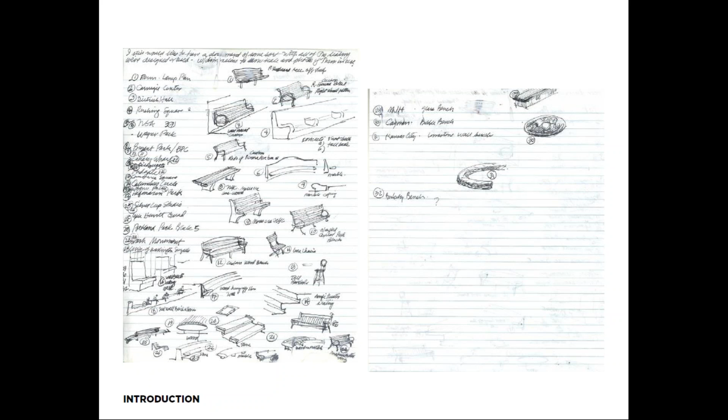Well, I know you worked on Apple in the beginning, some of the earlier mock-ups. Yeah, a lot of those. Still changing. So custom benches and furnishings is something that Olin has always been involved with in the last 30, 40 years. And a few years ago, Laurie sat down and just started listing how many benches have we done. And he started writing out the project, doodling every profile, and hit 32 and realized that we needed to actually start recording this information.

And so, was this you, Will, that you helped put this together with Bonnie? Katie and a lot of other people. Yeah. So this is on the knowledge base. We've pulled all the details and profiles of a number of benches. I think this is somewhere in the 30s, but all shapes and sizes, freestanding, backs, without backs, double wide, attached to walls, all sorts of varieties that I'll kind of explain, a little bit of history, pick a few benches. Not all of them are going to get their photo in this, it's just too many.

But I'm going to explain kind of the process that's involved for custom furnishings, who to coordinate with, when to do mock-ups within each phase, and then some lessons learned that I've learned and others in the office have learned through some of our installations. So why do we do custom furnishings? And why not just pull up this lovely catalog I saw up front yesterday, Street Life, to Miss Laurie Olin, where it seems like there's every type of bench you could get. It's all off the shelf, but it seems a little fake, because everything's photoshopped into some other landscape. But we do go off the shelf quite a bit for a lot of our furnishings.

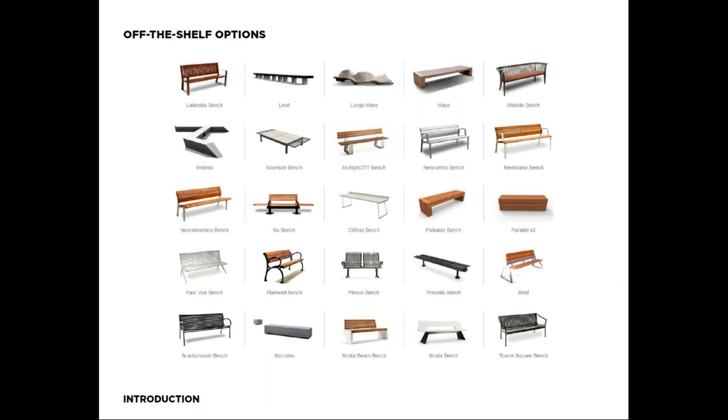It's easy to go to Landscape Forms, select a bench, and they have all sorts of varieties and styles, and a lot of times this is good. This is what they do. They deal with this every day. They know how to work with all these materials, and they're continuing to update it. And they all have their place. So this is at Comcast. They have their place in the landscape. It's an off-the-shelf item, and a lot of times it depends on the client and the project. When you need to do a lot of benches, you can't do them all custom. The cost is too prohibitive. And a lot of times if you work with universities, they're going to have their standards ahead of time, or you help develop that standard with them through a master plan and guidelines.

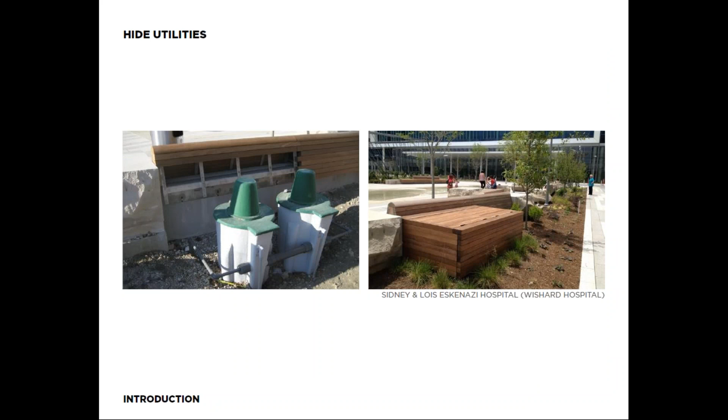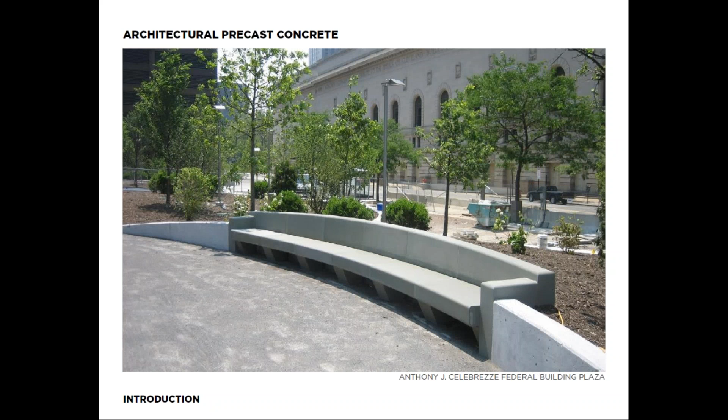But sometimes you need your furnishings to form space, like a park, or it's more central to the space, like at PAFA. They can be security elements. Sometimes we need them to hide big, ugly utilities. They're accent lighting in our landscape. And there's a lot of different materials that we've used over the years. There's stone. We've used architectural precast concrete at Celebrezze. It's all prefab in the shop and brought out. Wood, steel, glass, and acrylics as well, the bubble bench at Camana Bay. And we've even done recycled materials for Growing Minds out of pallets that we put together in the basement here at the Public Ledger Building.

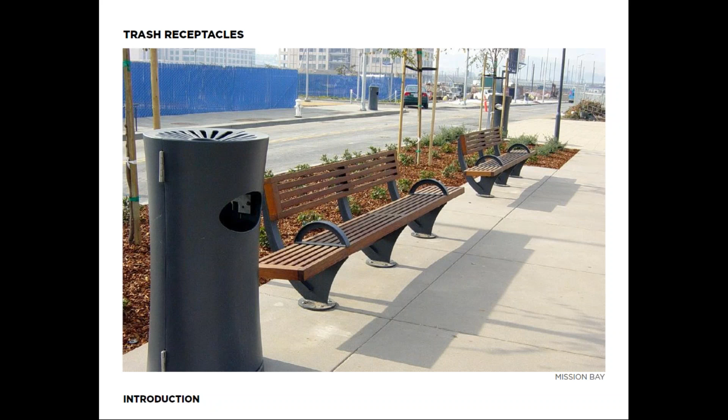We've also designed trash receptacles. I don't know if this one is still around. It used to live right outside this door, and it was a big sign not to put trash in it. That was their zombie thing. Yeah. That was at Mission Bay. We're working with Landscape Forms right now at Apple to develop a trash receptacle that's going to be used on the campus. So we're still playing around with trash cans that are custom.

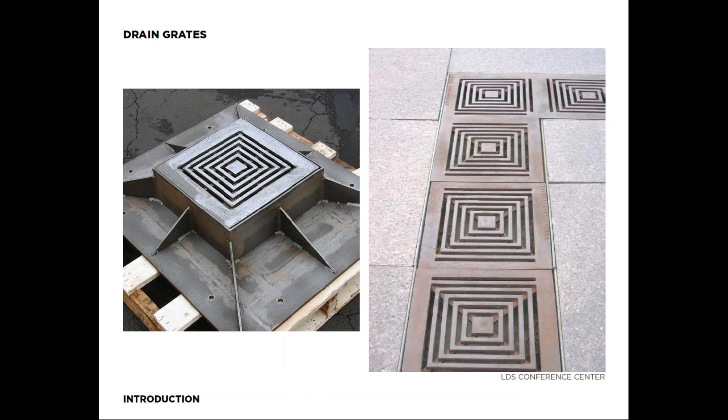And tables, like the grande cheese, that Sue's working on now with Michael to develop this tabletop that's also a fountain, and it drops off into a basin. And then there are all these little tables that connect to it at the end that can then be spread out across the courtyard and used on a daily basis from the 2 to 4 person tables, but then it can be all ganged together on this fountain table to get the whole company together to have a big event.

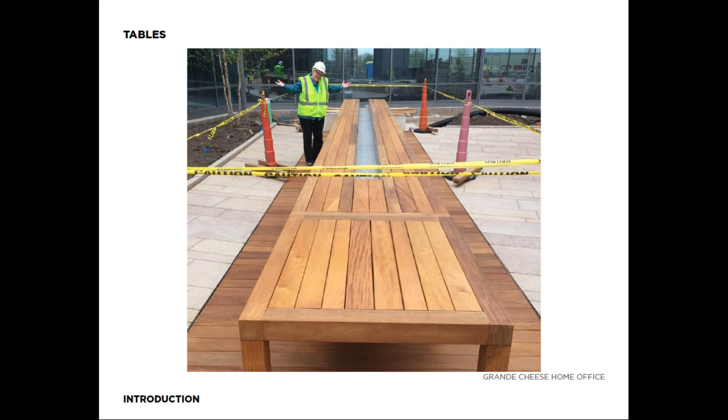So not every project can do this, and for a number of reasons. The client sometimes doesn't want to deal with it. It's a lot of headaches. They're customized. Some of them have strict maintenance requirements that are needed. Budget, both for the construction budget, they can be very expensive. I think the one at Museum of Jewish Heritage was $1,000 for every foot in length, which was kind of how it averaged out. So sometimes it just doesn't make sense from that standpoint,

and also costs us a lot of money. It takes a lot of work to do these custom benches and to design them structurally and fabricate them and to go through all these various mock-ups. And then schedule. So a lot of times there are lead times to procure the materials, especially some of the woods, FSC certified products. And construction, they are very tedious and require some specialties.

So the process, try to break it out for each kind of phase of work. So in concept, you're coming up with the flashy graphics, you've got the idea, you're making the client love it because they're the ones that need to say that they're going to pay for this throughout the project. So get their buy-in early, get them excited. Schematic drawings, you kind of start to get into a little bit of the nuts and bolts because you need to provide a drawing for pricing. So you need to get a rough cost established early on.

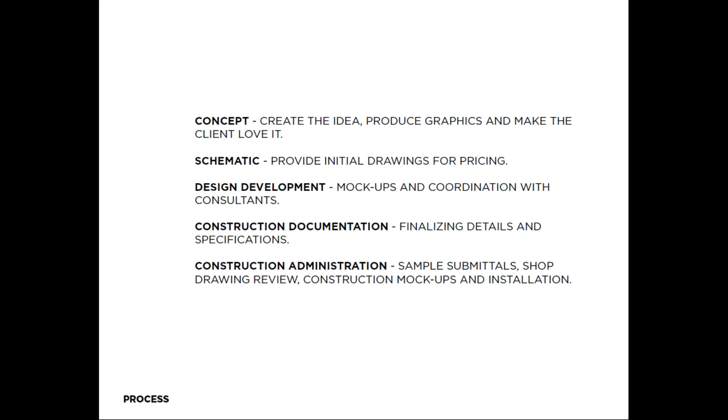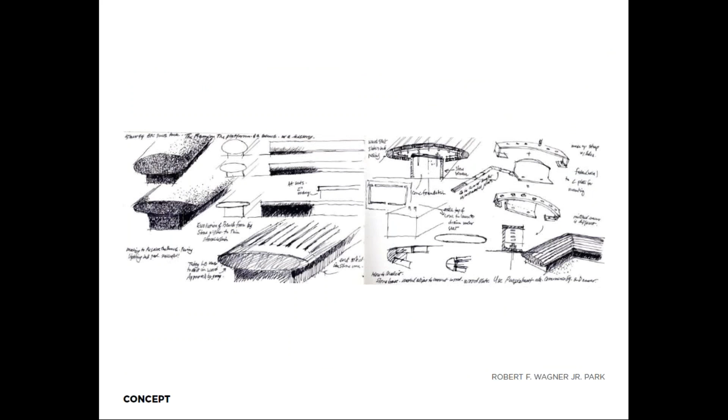So concept phase. These are some early sketches pulled from Laurie. This is Washington Monument Bench, Wagner Park. Kind of worked out a lot of the details with some of these drawings for the straps and kind of developed the overall profile and then worked out some of the nuts and bolts. And then this is Yale Hewitt Quad, which is a stone bench that had a lot of curves and twists, and there's a big sculpture.

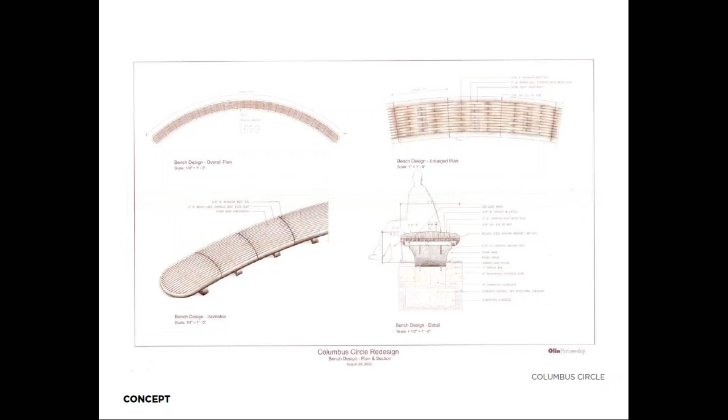Camana Bay, so this is the bubble bench, one of the earlier renderings. You guys are going to see some nice stylish graphics here, some of these early days. Columbus Circle, some of the original sketches there. The nosing was quite different in that section. For Museum of Jewish Heritage, I'm not sure who did these, if this was Howard that did these sketches. But this was him kind of storyboarding the front entrance and how to deal with security to make it look like it wasn't security. Instead of putting a string of bollards, we wanted to create furnishings that would allow for that barrier to occur.

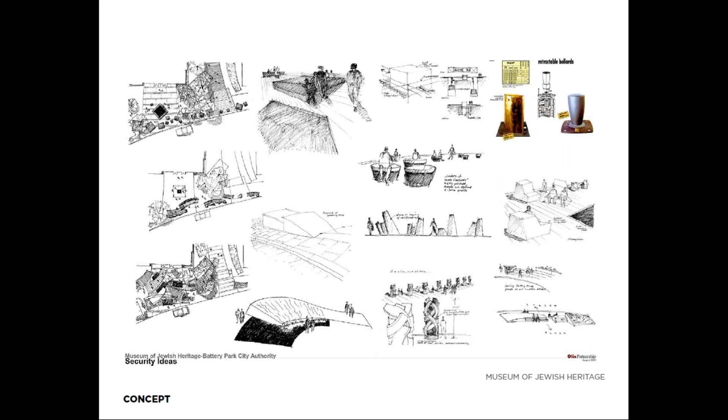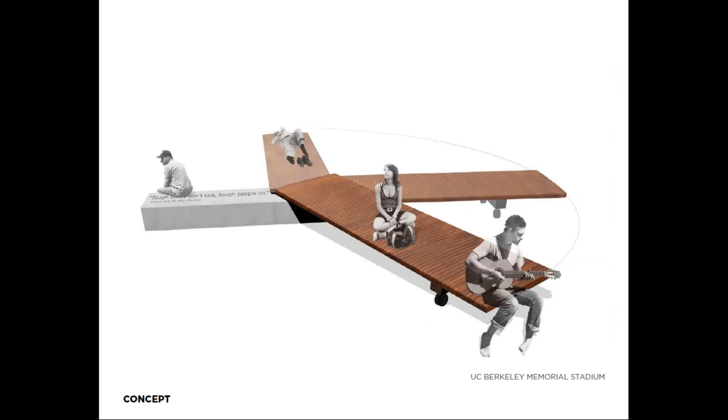And this is an early rendering of MJH on the back side, the water side of the museum, of the central sphere. And sometimes we design benches that never get built. So this is a concept at Berkeley that went through a number of iterations. Jesse Forrester was working on this and was really trying to work out the gears assembly to make this move and be flexible and not kill somebody and pinch them in the swing, and working out the wheels. And this one, for cost reasons, just didn't make the cut. The ribbon bench at Canal Park, the early sketches. I think Katie Martin was doing these.

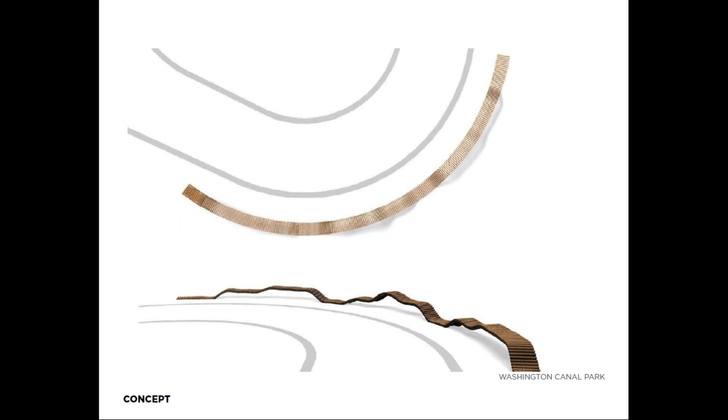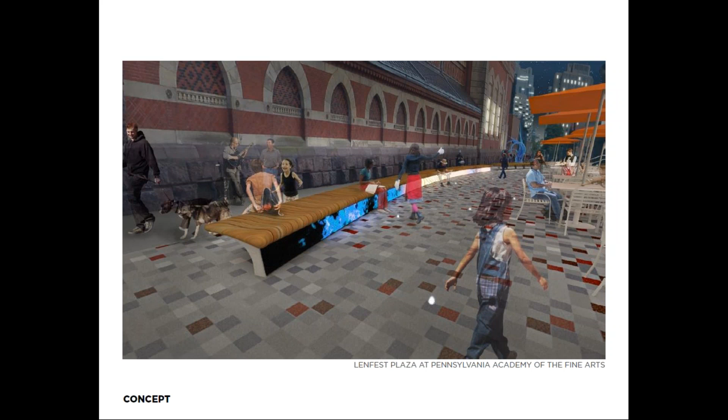And at Lenfest Plaza, PAFA, there was an idea to have this billboard, this kind of LED display that didn't make the cut, but the overall bench did. And this is an example of a schematic design drawing that Bob Bedell, God bless him, sat down one day and drew this, half scale, took that earlier rendering of what the bench was, and we had other sketches and renderings, and he figured out every angle and worked out how to put this thing together. And it pretty much resembled that toward the end.

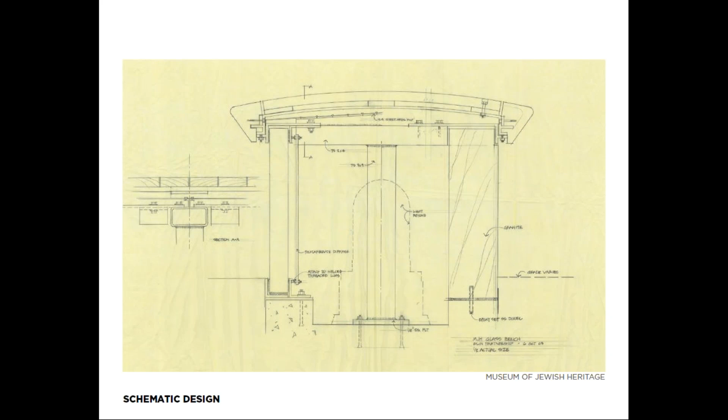This one was a T-post with a leveling bed, so that was your structure that then you ran all the angles off of, and they were regularly spaced because they were a security element in the plaza, and you could tie in your glass on either side or the stone on the back side. And it also needed to be accessible because at this time they had light fixtures at the base, and eventually it moved up to the top underneath the bench coping, so you didn't see the source.

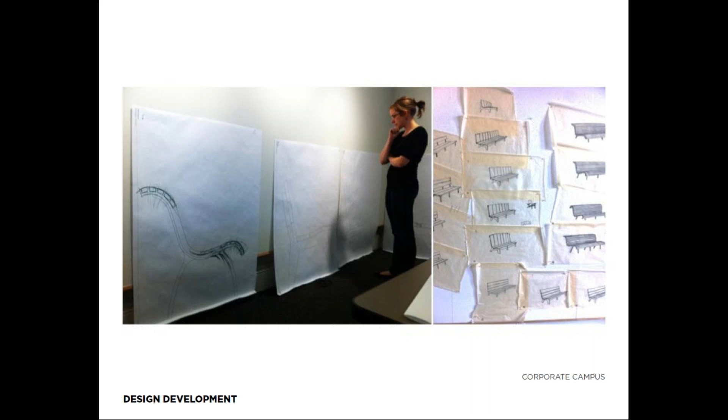In design development, we're constantly refining and tweaking. This is for Apple. Laurie was drawing over a full-size printout and working out all the curves and getting the slats right and the angles right, and then drawing multiple versions of a freestanding bench just to get the legs right. He was fiddling around with what the legs should look like and how they should be supported.

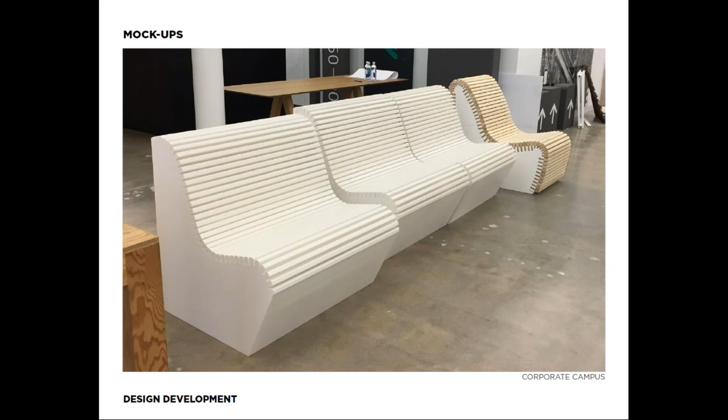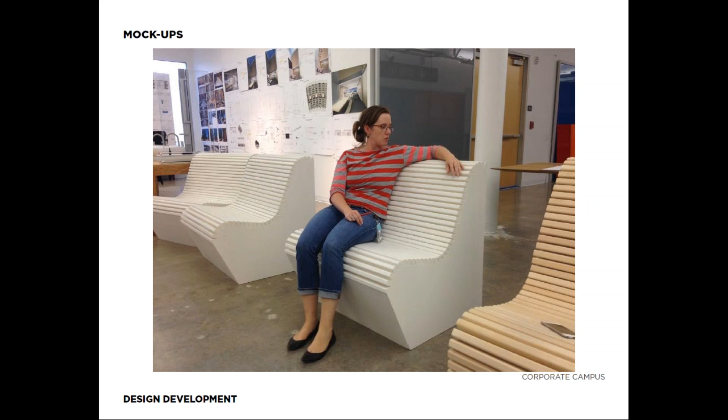We did a number of full-size mock-ups out of foam, a cheaper material that can be routed, for people to sit in and test, and all these were little different heights and different widths and little different curves. We couldn't even tell them apart. It was really hard. But actually, when you sat down in it, you could really feel which one was the right one. But if you lined them all up together, it was really hard to label them all. That's Sarah testing; we wanted the right arm height, shoulder height for the back of the bench.

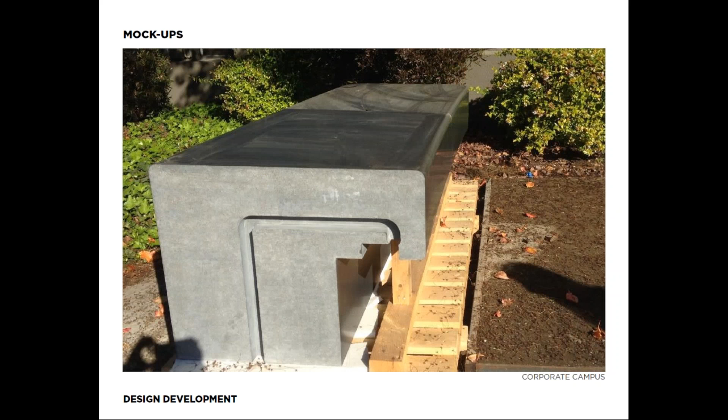We also did the core benches, these other freestanding stone benches that we also cut out of foam, had milled. And then this is one of the actual stone; the next step was to build it out of the block. We did a diagram of how the conduit would come in, and they actually milled it, which doesn't really work, to get the lighting conduit into the light strip that's underneath the bench.

And then sometimes your mock-ups can be really crude and out of just found materials. Agnes put this together today. You can use foam core and books and cardboard to just test it out to make sure. And you found out that it was too short. Too short. What was the right height? Do you remember? Well, it's pretty good. It was 16 inches. 16.

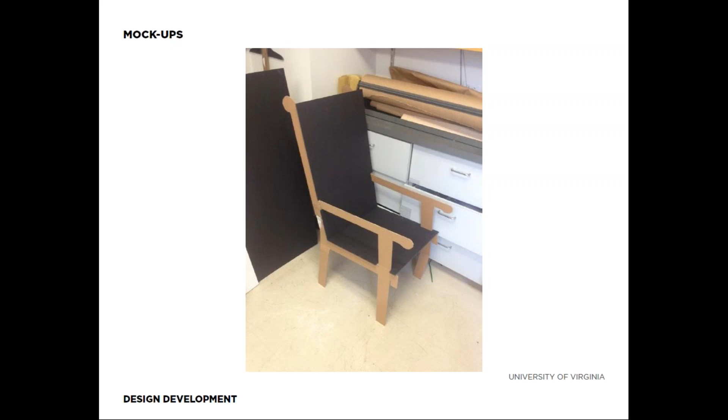You can build them out of foam and T-pins and pin it all together and put a piece of paper over it and actually sit on it. A lot of times on projects you'll see them sitting out in the hallways, and people can walk by and sit on it, test it out. What do you think? Is it right? Because everybody's different scale, size, height. Maybe comfortable for Laurie, but he's taller than most people.

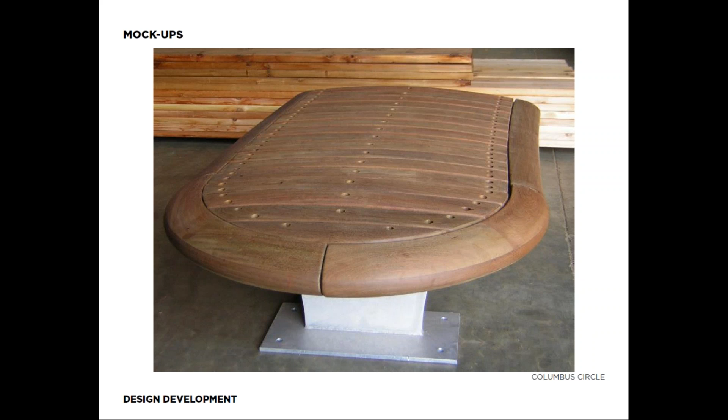And then this is a Columbus Circle mock-up where they actually did a piece out of the wood to test it. A lot of times it's a good dry run for the fabricator as well to test out the constraints with the wood and what they can and can't do. Sometimes the mock-ups can be little tiny 3D printed models. This is the only piece, I guess, that still survives. That's at Greg's desk and it's falling apart. Be careful, you can mess around with it.

And this was Hopkins, right? Can you talk a little about that one too? Like, what was the purpose of this study? Because it was a double-sided issue and there were 8 double-sided benches. Then there's an upper terrace and a lower terrace. And to get both the size of it and understanding the height of it so it will be safe and how to transition into the end.

I don't know, it's kind of evolved with both terrace. It's adjacent to the Little Prince Garden, which is a quite versatile children's garden. We also wanted the bench to be somewhat whimsical. Just as an aside,

after installation, the chief architect for the campus decided to walk up the top of the bench. They decided they needed to put a rail on it, so they did, and it turned out all right. And we had made the bottom big enough to put a big planter on it, which they do to keep people off.

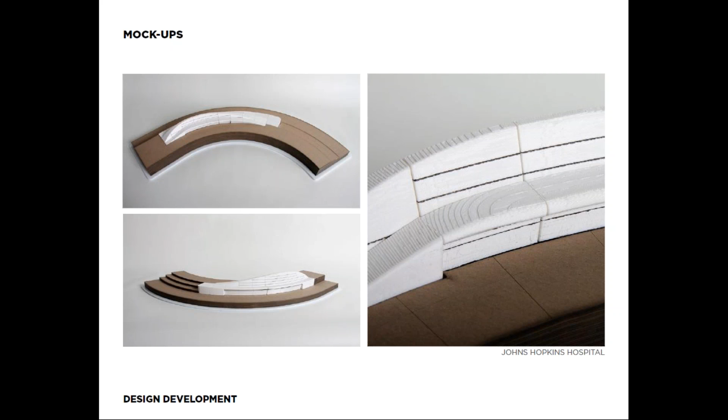There we were also playing with a lot of different types of glass, working with Joel Berman Glass Studios out of Canada. We were toying around with fused glass strips to get this kind of texture that we were looking for. And he played around with glass for about a year to try to get it right, and we ended up just going to cast glass. We finally got one piece right, and then we just cast it.

Because this just kept breaking. He would send us samples that would show up shattered, and it would always break apart. In the sunlight and condensation, everything would just pop. We also played around with some dichroic glass in this as well, which is what Comcast used in the trellis, to play around with different light effects.

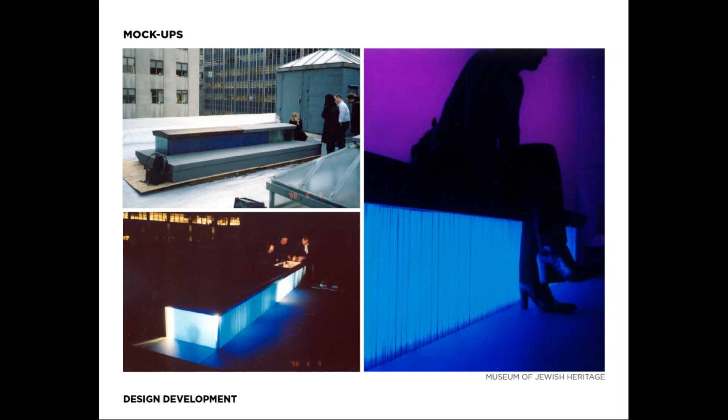And then the bubble bench, this is the full-size mock-up that was sent to us in our studio and was here for a bit. Is Richard here? No. This was Richard's baby for many years. And he developed this bubble system that has a couple different lenses and these cylinders that hold the little bubble balls together, and then the light has a diffuser at the bottom, and he's got a whole manual. He can talk to you for days about this if you want to learn more.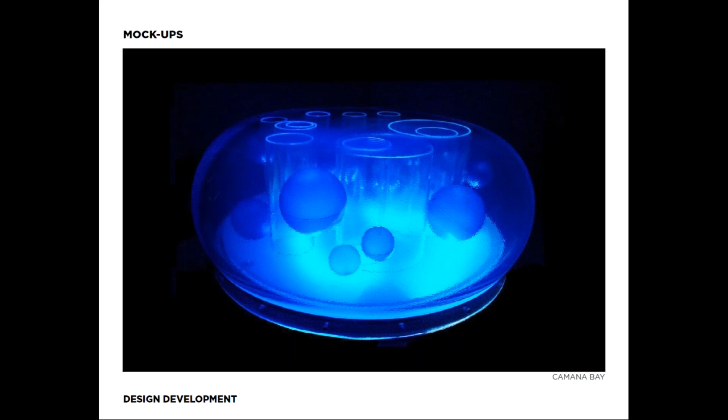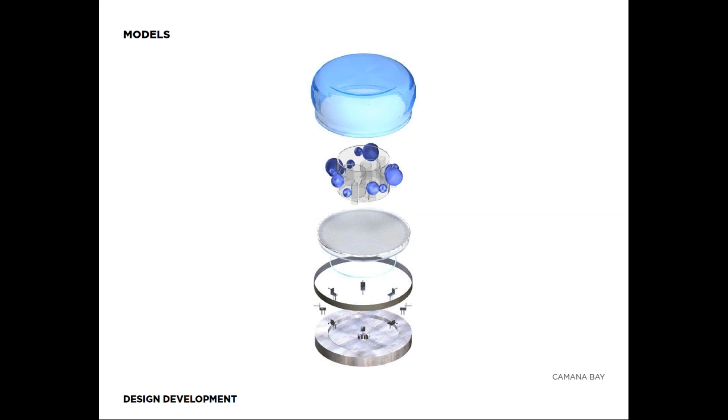But this is roughly how it goes together with the 3D model. You have the concrete footing, and then the little L brackets clip together. You've got the diffuser plate and the frame, and then the little cylinders with the bolts, and then the overall cover. And he was telling me that they even had to fill the bench with a gas because there would be condensation built up in between the lenses. So there was a final step before you fuse it all together to pump it full of something.

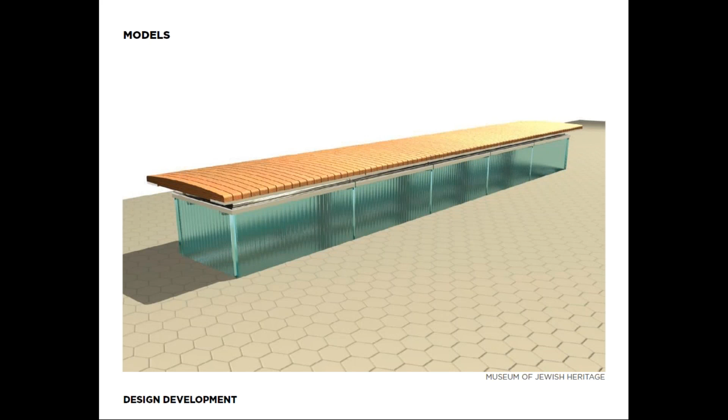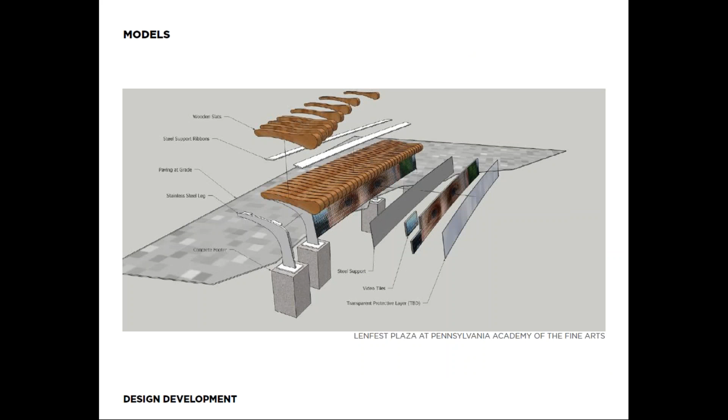And all the layers that came together for that bench, the structural support, and then all the little different frames and clips and things to hold all the glass together, and then the LED fixtures within the top. Now you know why people want to go off the shelf. Yeah. And PAFA as well had its series of complicated details, which I've got some installation photos of this one going in. So when you're in DD, you want to start coordination.

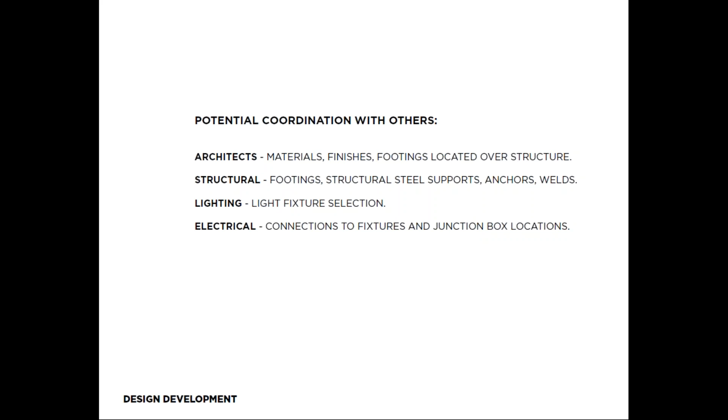You want to make sure this thing's engineered. They are pretty massive structures a lot of times, and these things are not light. Hardwood is very heavy. Lighting, we always plug in lights, so you'll need a lighting designer to help you select that fixture, and then coordinate with electrical because you've got to get the conduit in there, you don't want to see it. There's junction boxes where the electrical is bringing power up to a certain point. You want to make sure that that's away from the bench. You don't want to have a box right next to your feet.

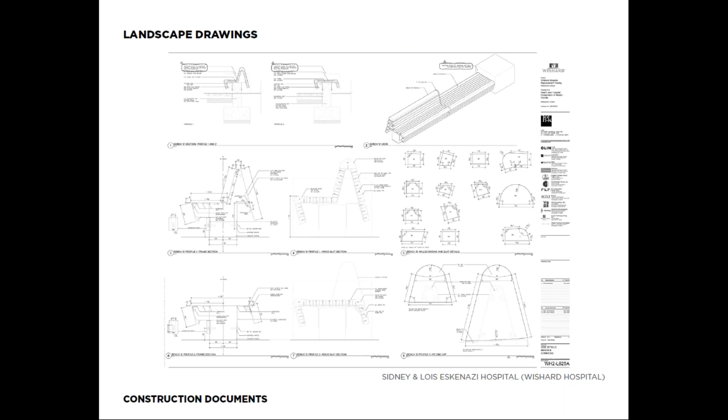So this is an example of a construction document sheet set. There's two sheets that I'll show you. So this is for Wishard. We start out with the typical section at the top of each profile. We had a 3D axon to help explain the profile and how the bench came together. This was a layout for all the steel. This was a layout for all of the wood. And then each wood nosing piece profile, cutout radius, dimensions. And then the same for the other profile bench. We had the backed and we had a backless version.

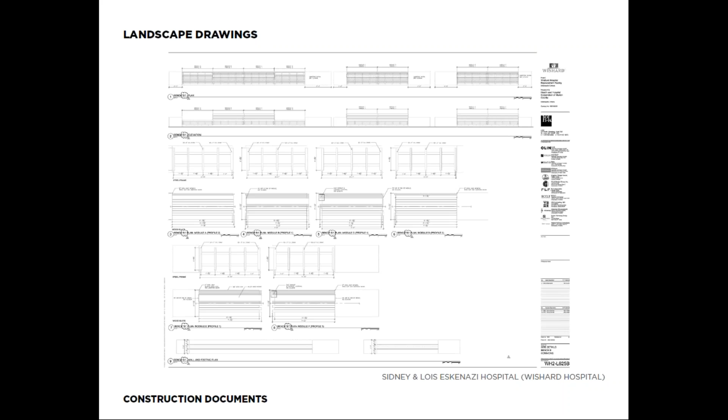And then on the other sheet, this is where you start to set the modules together. So we had the plan, elevation, we had a steel layout plan for each of those straps, what the spacing was, coordinated with the wood layout plan. And then the same for the other bench. We had footing layouts because we wanted to make sure that those were in the right spot, because we wanted the wall to go underneath the bench and sit perfect. So we provided as much information as we could on these drawings. It's also important to remember compatibility of materials, especially when you're using metal fasteners. Yes, like metals.

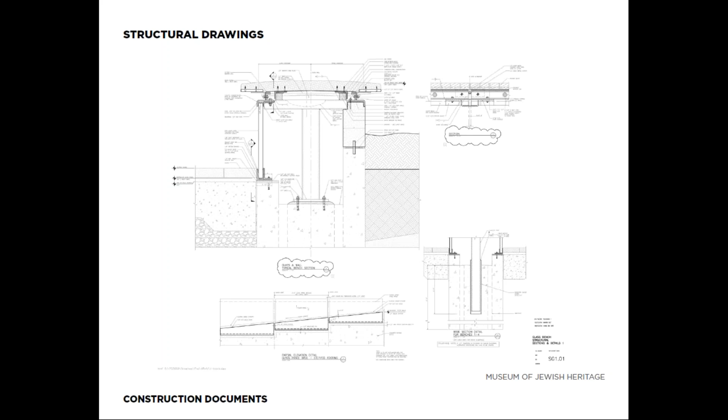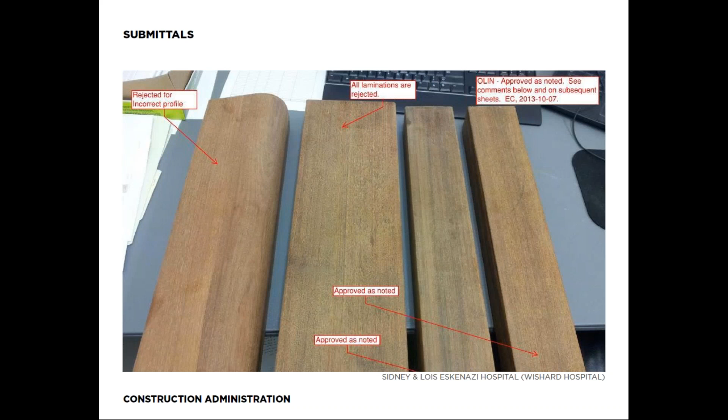And then for CA, these are an example of submittals. We received samples for Wishard, and this is our mock-up of what we reviewed. They had profiles. They had laminated things, and we did not want laminated wood.

And this is an example of a shop drawing that's required, and our spec for custom furnishings is very descriptive of what we're looking for. We want shop drawings that are completely coordinated, because what they'll try and send you is the steel guy will send you his shops, the wood guy will send you his shops, and then the lighting guy will send you his, and then you're the one that has to put it all together and make sure it works out. And that's not what we want. We want them to work this out.

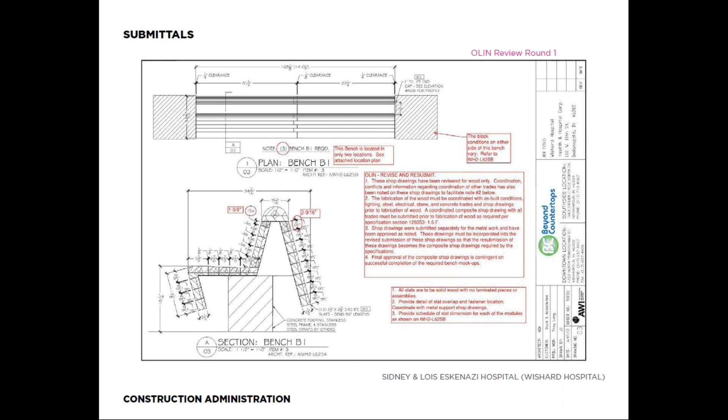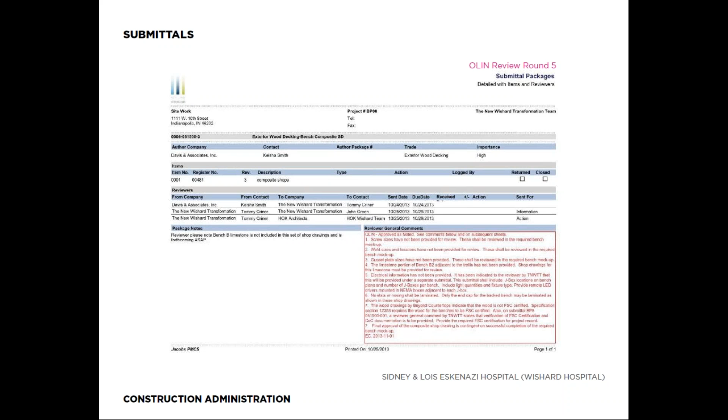So our specs are written so that the general contractor coordinates that with all the fabricators. It's a joint package of all the materials. They've overlaid all the information so that you know that it lines up. They did not get that on Wishard. We went through 5 rounds of reviews where we rejected it, revise and resubmit each time, until we finally got to a point where we approved it for fabrication, and a lot of the details would be worked out in the mock-up review there. So don't feel like you are forced into accepting something that doesn't meet your spec. It's a contract, they need to do it. And their biggest problem was they didn't have a CAD guy to overlay everything, which is bullshit.

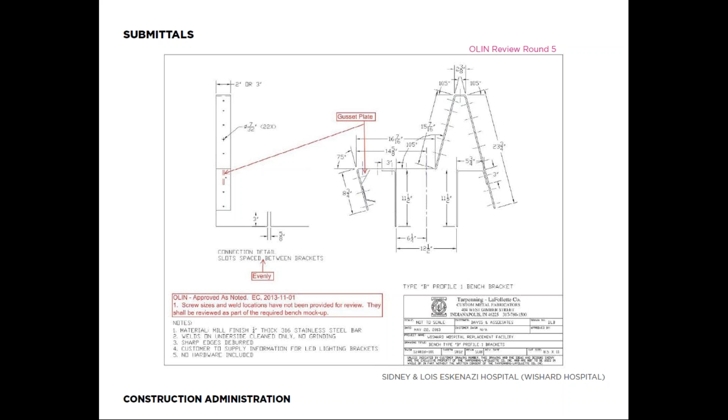So this is an example of the steel shop drawings that we marked up and sent back. Basically our drawings with all the dimensions and additional information, slot layout. Fabrication, a lot of times these are built in the shop. You've got greater control in the shop, less out on the site. So you want as much as you can built in the shop, and that is what our specifications require.

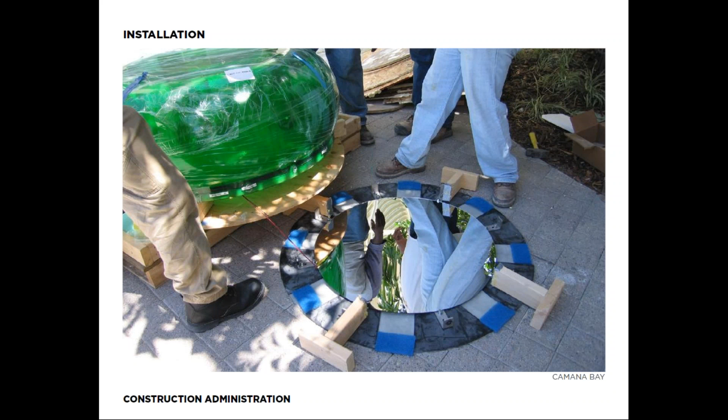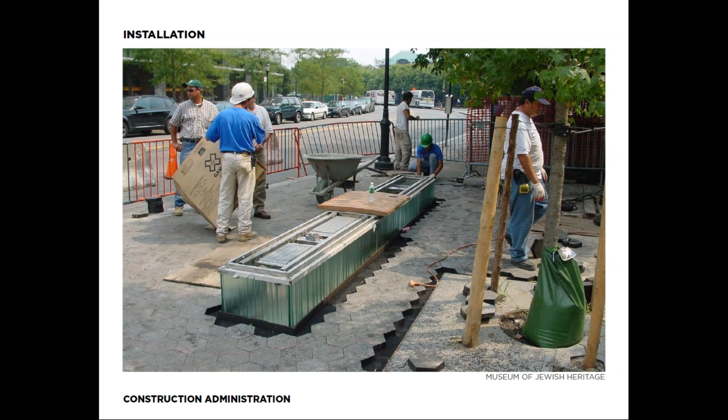Some are a little more complicated. This is MJH, where you can see how they had to do the paving around and leave out the area for all the field cuts later until they got the stainless steel chute set and the glass set right. And all the wood pieces were built in modules that could be lifted up and accessed. And those were the bolts, and I don't think they ever did put the bolts in on this because they were so heavy that they really weren't worried about people coming by and picking them up.

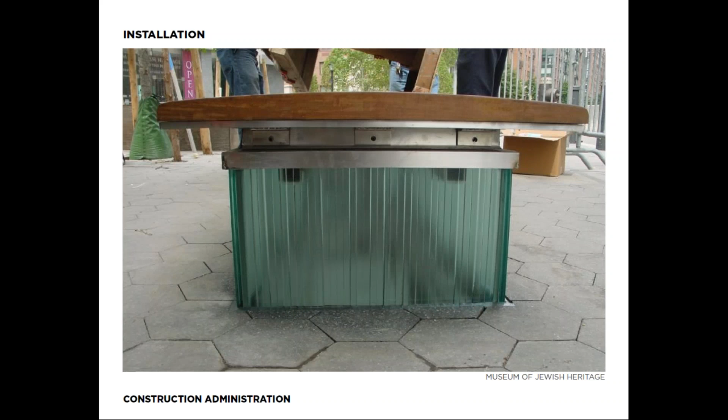So we had to tell them to at least put insect screens in there because the flies and bugs were getting in there. That's one huge piece of glass, it looks laminated. It is laminated. It's cast. Yeah, so we ended up going with cast. So it was 2 pieces laminated together, so you had the textured piece and the structural piece. And then the LED lights were all custom fabricated and designed by our lighting engineer, and they were on a hinge so they could flip them up and maintain them.

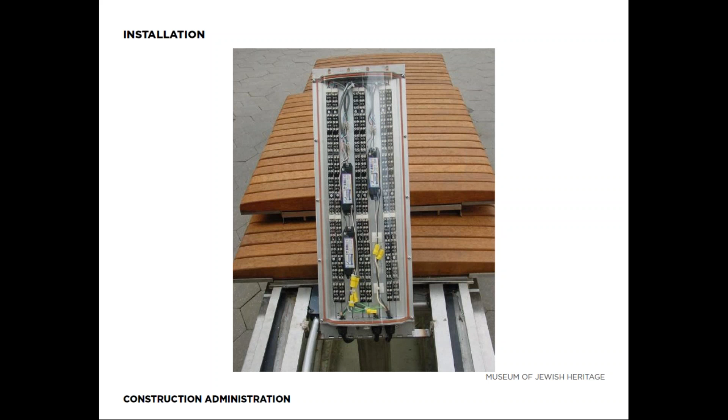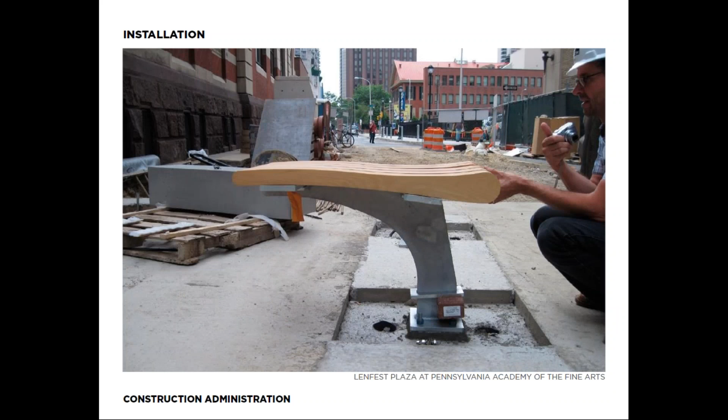But all the pieces showed up on site individually. They couldn't build this in modules. So they set each pedestal column on its own, and then they ran a steel plate across to get the curve, and then they were hand setting each individually in the field with the spacers to get the curve right.

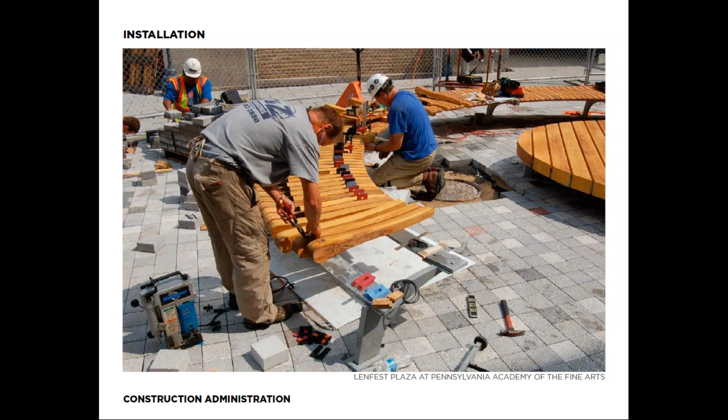And then we did the stages as well. And I don't know if you're going to show this, but the end pieces were custom models and then CNC built separately. You can see one example there.

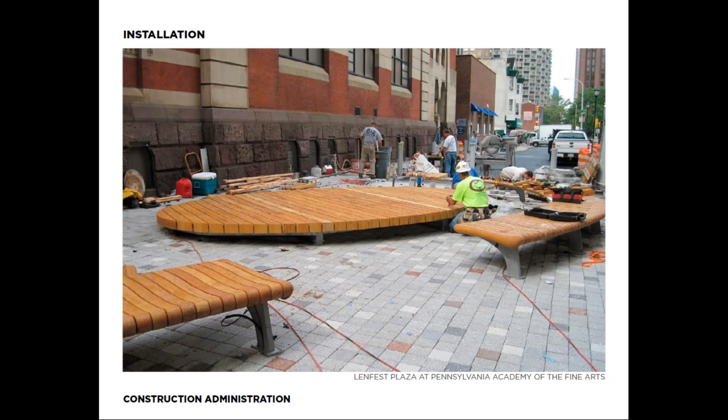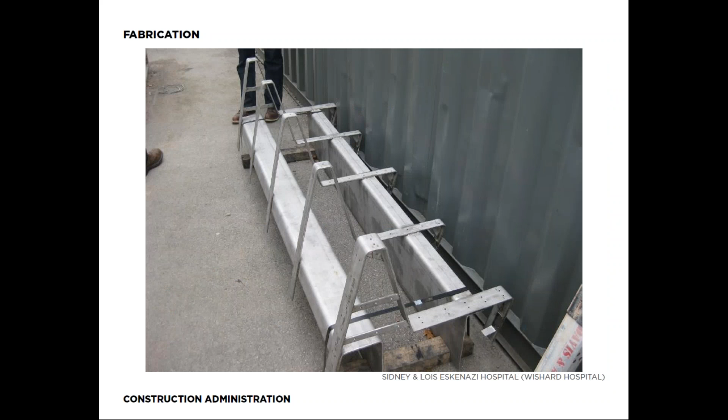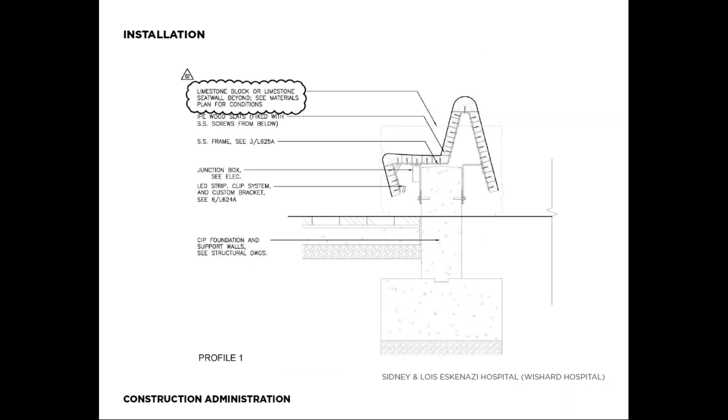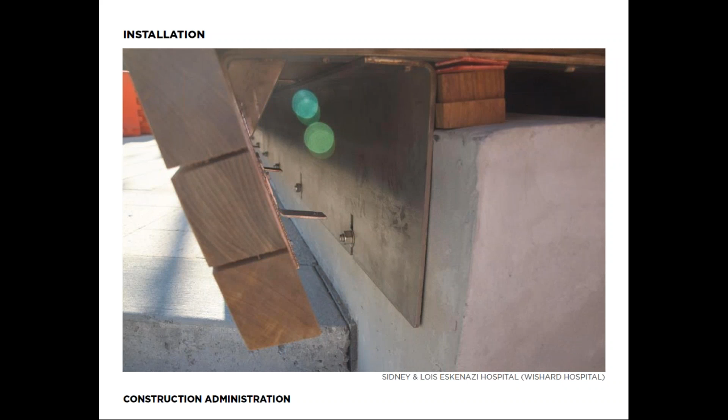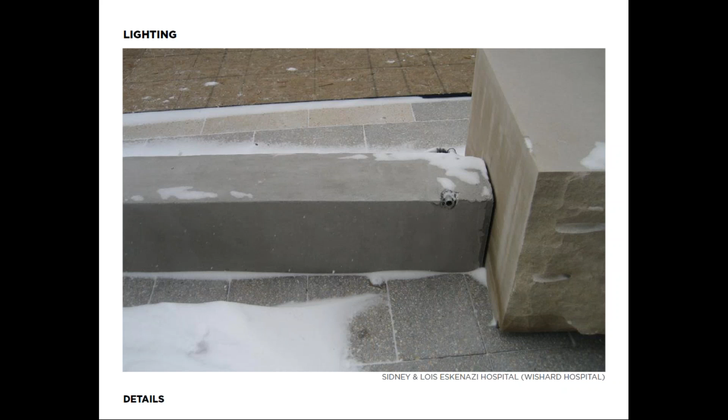So you want to leave some flexibility with your design as well, because they're going to need it in the field, because they're working with a concrete contractor's tolerances, which aren't as tight as your bench. And then you can see the LED clips that were there to receive the light. And this is one example of how to get conduits and electrical feeds and boxes up through the footing. They kind of install the conduit ahead of time, and they fed the lights later.

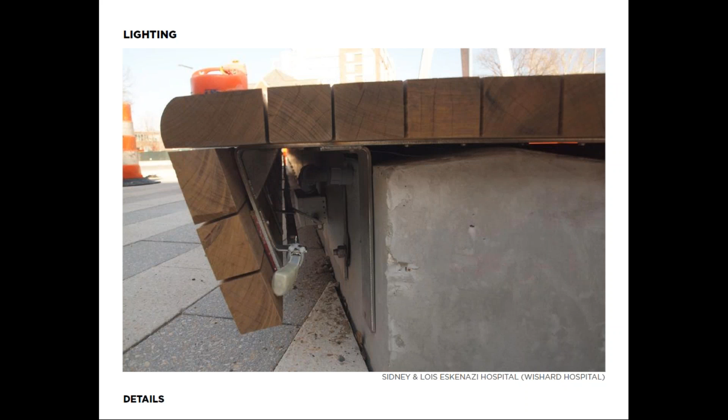You can see there's a little box in there that will never be accessible, I'm sure. Usually there's drivers that are required, especially for LED fixtures, that you need to find a hiding spot somewhere. And they generally don't need to access them as much, but this is only leaving a few inches for some guy to crawl under and install it. And at MJH, we were able to hide all of our drivers below the coping as well.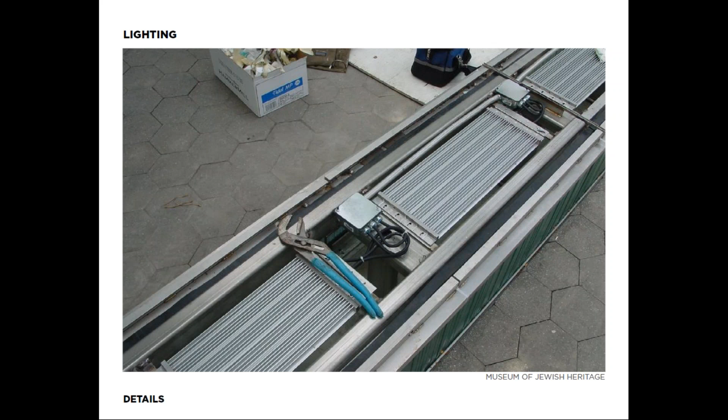I think PAPA had a really nice detail on how they clipped their light in there. It's probably one of the better ones I've seen. Wishard, I don't know if you saw that, they use zip ties. Not our detail.

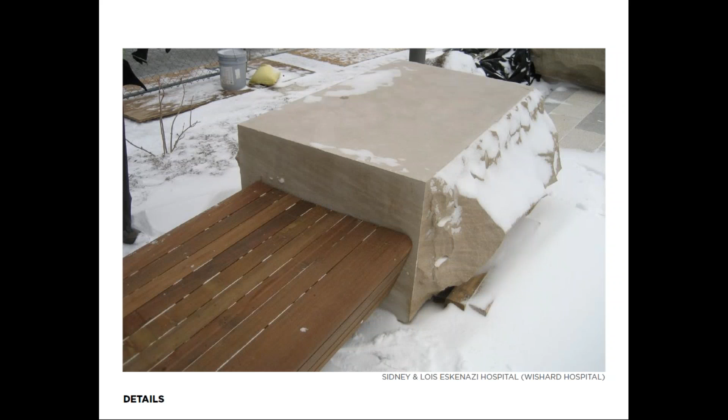And then you can see that this is where they screwed all of the fasteners below, so you didn't see any of the screws on the surface of the wood. Think about the details. We study a bench so much in sections, sometimes we kind of lose sight of the end conditions and how you want the piece to end, and you don't want to see the structure, and you want this thing to just be floating. So I wish we had limestone blocks on some of them.

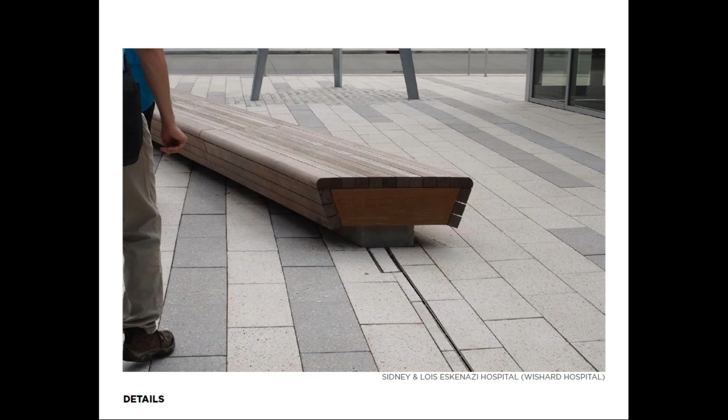And then our freestanding ones, we had a laminated piece of Ipe that was fastened on the backside, so to kind of cover the fasteners there. And again, the barns did a similar detail, but they didn't want to show the wood slats in profile.

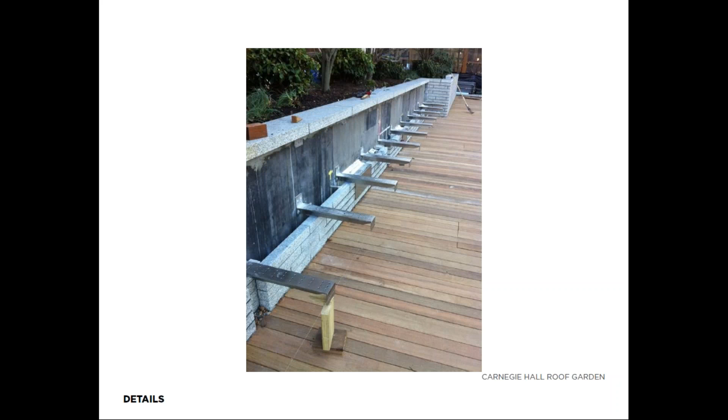This is the Carnegie Hall. This is a good example of a wall-mounted type of installation where all the brackets are tied into the planter wall. You can see it's very complicated. You got the deck and the stone veneer and the leave-out space for this bench to sit in there, and I think it's a very successful detail of how to do a nice, comfortable backed bench on a stone wall.

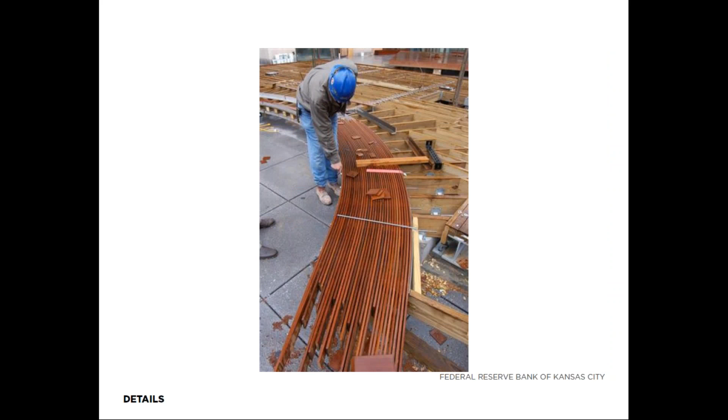You can do a lot with wood. You can curve it. Federal Reserve Bank, Kansas City is one example. And I think they probably had to use steam to get it to bend right. And you need to understand thicknesses of the wood and what you can and can't do. Talk to the wood suppliers, what the limitations are, understand those constraints.

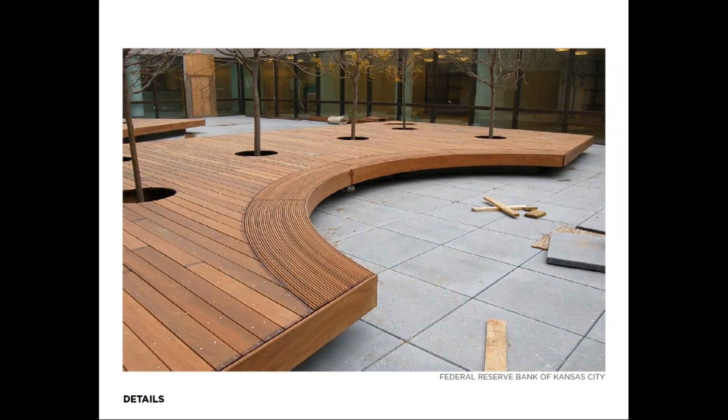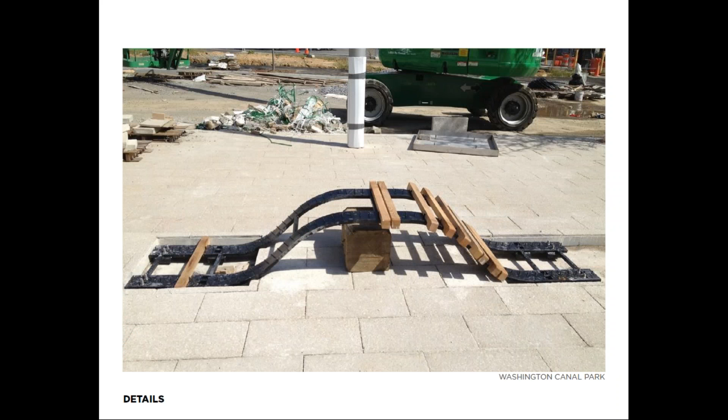We also did the same at Director Park. Nice curved bench with the slats following that form. And then you can also do curves by running the slats in an alternate direction, perpendicular to the curve as well. And then you can go up and down, do all sorts of things with this. So this is the ribbon bench being installed.

Sure. I don't know if this is the case, but I'm going to make up that this is the case of benches cannot span over expansion joints. And so this... Why? Expansion joints in your slab, because the slab is moving and the bench is a very fixed object, so it's going to put stress on the bench when the slab moves.

So this is a great photo because this would be a solution to having a bench that feels like it spans over an expansion joint. Yeah, if you were to line up your straps on either side and have it cantilever a little bit. Yeah, exactly. But what I'm pointing to specifically is that in the nosing, the sides are separated. Right. And you can coordinate that also with how you segment it and create a bench.

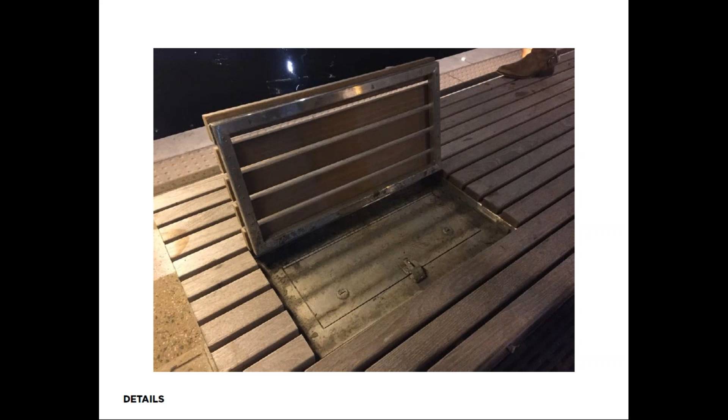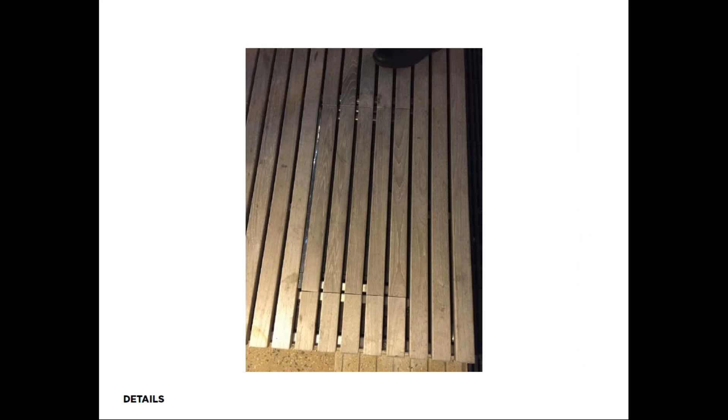Sometimes you can build little hatches and hide things. This is not our bench. I saw this at Chicago River Esplanade, where it was just hidden. It wasn't locked. It had a nice hairline joint, and I was like, oh, that's a little piano hinge. I couldn't open that, so I didn't know what was in there.

So resources: there is some information on the knowledge base. I think we should continue to populate that and get some of our more recent benches added. I'm going to talk a little bit about Landscape Forms. I think they were in here recently talking about their studio and what they can do, and they are a great resource as well.

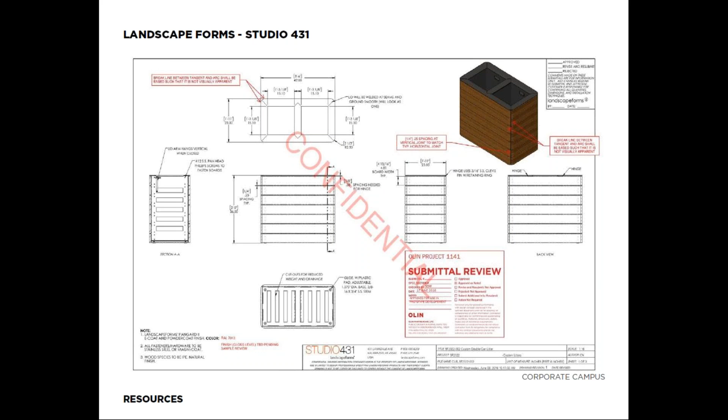They've been fabricating benches for many years. They understand what wood is readily available, what it can and can't do. They're very eager to work with us on projects and help us engineer some of these things. It's kind of tough. You need the right project and the right client to work with them, because it doesn't allow for competitive bids. You bring them on board, they've designed it for the project, and it's at their price. So it's just got to be the right fit a lot of times.

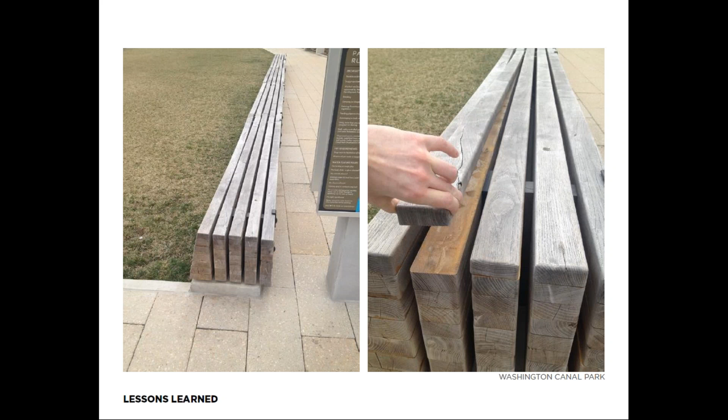Lessons learned. There's a few benches that we've done over the years where things didn't work out the best way. This is laminated black locust at Canal Park. Essentially, the bench was glued in profile and without wood fasteners. This was maybe a year or two after it was built. It was not that old, and you're able to pick up some of these pieces.

We were able to stagger the joints in plan, but we probably should have done the same in elevation as well to lock it all together, because you get these big joints of wood that's all warping and changing with the moisture content, going all sorts of different directions. And especially with longer boards, once you get a certain width, they can start to warp and turn and split.

I think a lot of this was the wood itself, as an experiment on our part with black locust. I think it has its part. The ribbon bench did well with its wood slats. If you get enough volume and keep the pieces shorter, you can probably use it. But Ipe seemed to be working out very well. It's still at Wagner Park; that was Ipe. And don't glue to steel. Use fasteners. It's going to hold up much better long term.

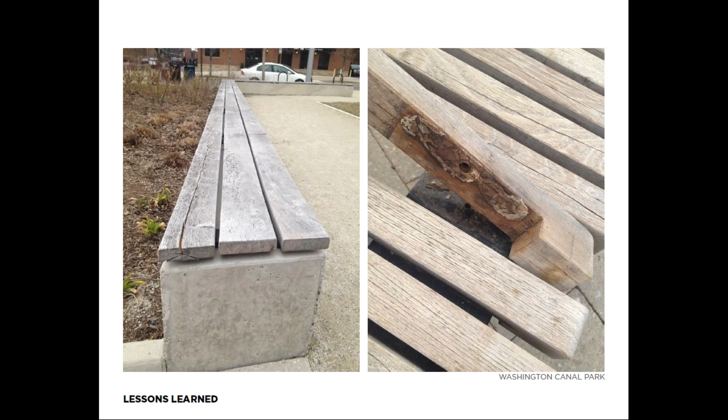This had to do with moisture content of the wood escaping too rapidly. They installed this in winter, and it was a very dry environment, and so I think everything was fabricated in the shop in a controlled environment and brought out in winter, and the moisture just sucked right out of the wood. And so we started getting some big, long cracks.

It's like a paraffin wax. Yeah, yeah. We've actually seen those checks appear, but then as the weather changes, they'll close back up. Yeah, there are checks that we allow to happen at the surface, and you can see it at Wagner Park. The wood kind of breathes, so especially with Ipe, you'll see little hairline cracks, but usually they're only like this long, and then they kind of seal back up. They kind of move up and down.

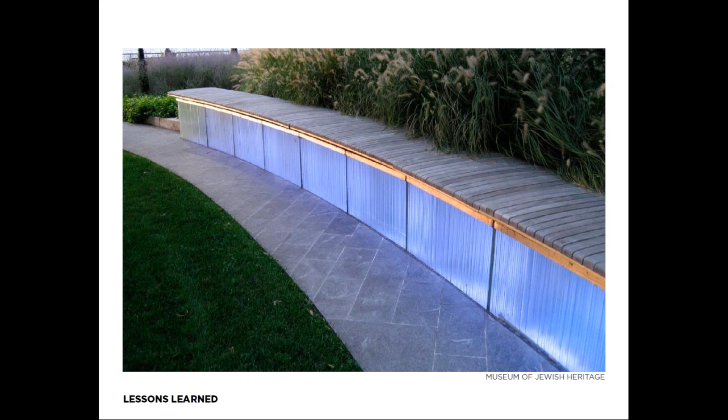The wood tops are very heavy. They're in like 3-foot and 6-foot segments, and it takes at least 2 or 3 guys to pick it up and lift it off in order to get in there. So they essentially don't go into them and fix things. That's it. Any questions?

Agnes? Regarding when you're in DD and you trust the structural engineers and the bench. Yeah. Well, what if you're in this situation where you sold the client a bench and they like it, and now you're in DD and the structural engineer looks at it and he refuses because it's so far. Yeah, it happens. You need to make it part of their scope. They're just looking for extra fee, or we find another third-party structural that will take a look at it for us and provide comment.

And I think there's probably also ways to require through the shop drawing process that the contractor provides an engineering stamp, like when they send you the steel structure, you have an engineer review it, and they can modify it. So there's probably ways to get the contractor to pay for it in the end, but you may not like what they come back with. They say you need to add extra steel straps and this, and it could be a redesign. So it's best to know before you get that far.